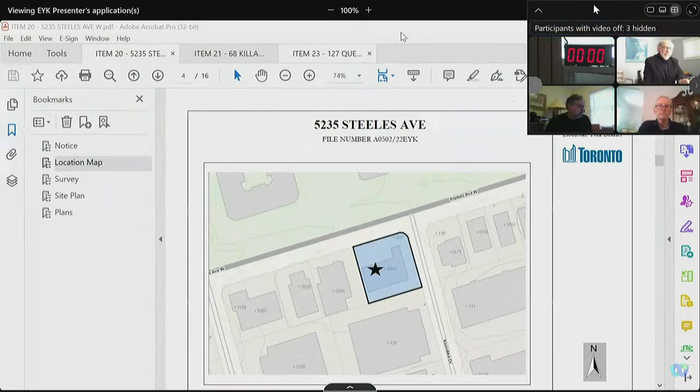Okay, and the speaker for this matter is Stephen Key. Welcome back, Stephen. Good afternoon, Mr. Chair and committee members. Sorry, I was muted. Again, my name is Stephen Chi, a senior planner from Design Plan Services. Okay, so there's no one else here. Just a brief one-minute explanation why you're here. Sure, it will be less than one minute. So the proposal is for a proposed restaurant to occupy unit 2 and 3, as shown on the site plan.

All the variances are only to recognize the existing conditions, which will be maintained. And I'm happy to answer any questions. Right, and obviously no one has any opposition to that. Transportation, planning, neighbors, we haven't heard, there's nothing on file. Okay, members, any questions for Mr. Keyes or someone ready for motion?

Mr. Taylor? Yes, Mr. Chair, I see this as a technical application, recognizing what's already in place. I'm satisfied that the application meets the 4 tests under the Planning Act, and I move approval without conditions. Thank you, Mr. Taylor. Seconder for that. Mr. Palmer's hand up first. Everyone else did as well, so I assume it's unanimous. All in favor? Okay, you have your approval.

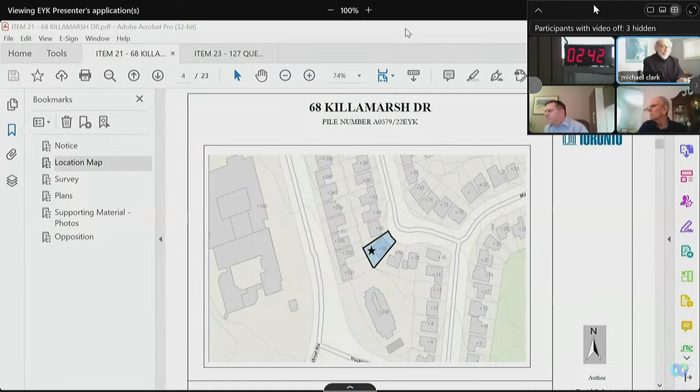Yes, loud and clear. Okay, this is for a 2nd-story addition above the dwelling with 3 variances. Seems rather straightforward. Do you want to advise the committee members of anything, or do you want me to just see if they have any questions? I don't think we need a whole presentation. I really don't have much to add. So, yes, we had the survey done. We didn't expect a few things, and yeah, here we are.

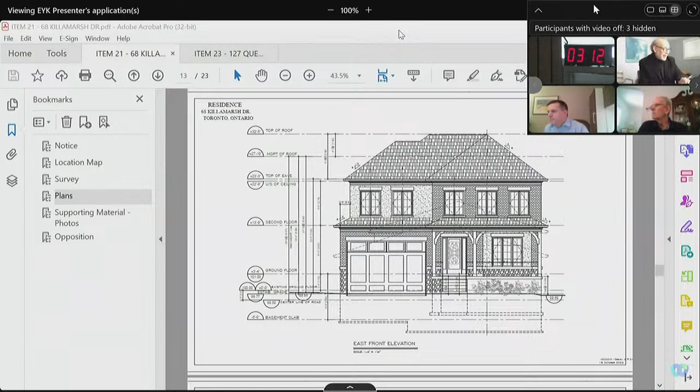Okay, and some of these are as a result of where the home is now, and you're just going to build up. Like, for example, variance 1, the north side lot line variance, that's where the existing home is already, correct? Yes, we're building exactly on the existing footprint. Okay, thank you.

Members, any questions for the homeowner, or is someone ready for a motion? Mr. Komorak? Yeah, I have no questions. If no one else does, I'm ready to do a motion. So I find the application to be minor in meeting the 4 tests, and would like to move approval with no conditions. Seconder for that? Mr. Taylor, thank you. All in favor? Okay, it's unanimous. You have your approval.

For item number 23. Okay, just hang on. Madam Secretary, I don't seem to have, hold on, looking for it. I have items 24 to 26 there. Okay, can someone do the introduction? Number 23 is 127 Queens Drive.

Yes. Okay, and now we're into deferral. The rest of the applications this afternoon are from matters that were previously deferred. So this was deferred from November 10th, 2022. So, Madam Secretary Treasurer, if you can do an introduction, please.

And we have one speaker, Jim Wallace. Yes, it's an application to construct a 2nd-story addition above the existing attached garage and a 2-story rear addition. On file, we have the previous minutes from the hearing, planning comments with recommended condition, and also the previous hearing materials.

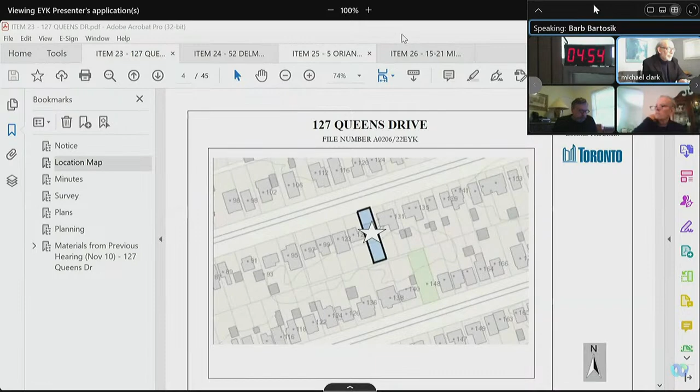Okay, Mr. Wallace. Good afternoon, Mr. Chairman and members of the committee. Welcome. Thank you.

Okay, so I don't think we need a presentation. Would you like to point anything out to the committee members? Not at this time. We worked with planning staff to address their concerns of the encroachment of the eave as part of the proposed addition over the garage. They wanted us to improve the condition. We agreed with their recommendation, and the eave of the addition no longer encroaches over the easterly lot line, Mr. Chairman. That's all I have to add.

Okay, thank you. Members, any questions for Mr. Wallace, or is someone ready to weigh in with the motion? Mr. Taylor? Yes, Mr. Chair, I'm satisfied that the two variances requested meet the four tests under the Planning Act. And I move approval subject to the Community Planning Department condition. Thank you. Seconder for that? Mr. Komarek? Just want to do a friendly, I believe there's a forestry condition too on it. Yes, thank you, Mr. Komarek. I accept that friendly amendment.

Okay. All in favor of the motion? Thank you. All right, yeah, it's unanimous. You have your approval. Thank you, Mr. Wallace.

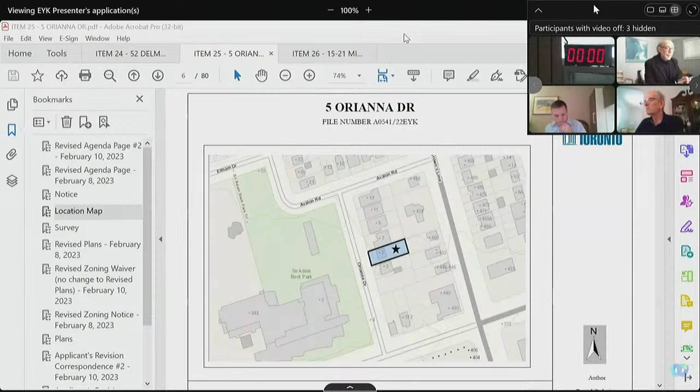Sure, let's have it, I see you've made some changes. There is no one else here in opposition. But just explain, I guess, the changes that you made to the plan.

Absolutely. So there was some back and forth with planning, sort of last minute, as these things tend to be. So we did reduce 3 of the variances, as you noticed, as you mentioned. First of all, variance number 2, the floor space index has been reduced from 0.58 to 0.56.

Secondly, the proposed side yard setback on the south side is now 0.99 meters, and that is to a chimney breast. The rest of the dwelling is set back further than that, and I can get into that in a moment. The other variance that has changed is the lot coverage. Because we increased the side yard setback, the lot coverage automatically reduced a little bit to 35.18%. The dwelling length remains as noted on the notice.

If we could just go to the site plan drawing, if you don't mind, please. There we go, thank you. So as I noted, the south side yard setback, which is at the top of this drawing, is 0.99 meters to that chimney breast. The setback to the dwelling itself is 1.34 meters, which is in excess of what's required by the bylaw. And the integrated garage is set back 1.04 meters. So that pinch point, that 0.99, is just to the chimney breast.

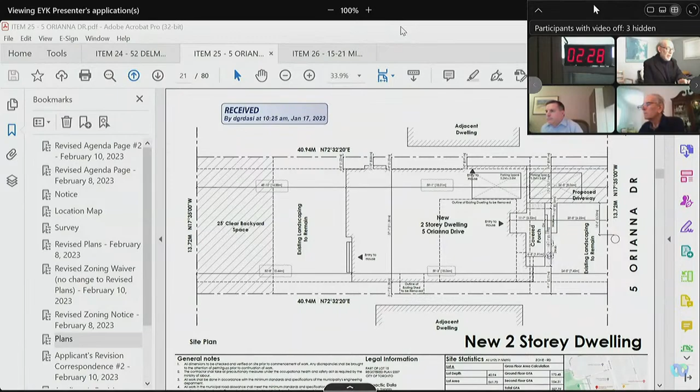Okay, and the last thing I'll mention, just one more thing, sorry. My clients did obtain a letter from the neighbor at 3 Orianna, that is the house to the south. The neighbor did state she had no objections to the variance, and those were the larger variances that were initially being contemplated. So she had no objections to those variances. I'm pretty sure she would have no objection to reduced variances that we're now proposing. I'm happy to answer questions.

Okay, thank you, Ms. Beaumont, for that presentation. Members, any questions for Ms. Beaumont?

And if none, it's just the purpose of the deferral last time, just to... There was the FSI variance that was missed on our zoning review. In addition, planning did have some concerns about dwelling length at that time. So we worked on the plans a little bit with them, and they were great to work with.

Any questions, or? Mr. Komorek? No questions. I'm satisfied with the presentation and would like to move approvals, as I believe it definitely meets the 4 tests.

So I'd like to propose we approve the revised, subject to the planning condition, which I believe illustrates the situation the applicant just described about it focusing on the chimney breast, tying it to the site plan of February 8th, and subject to forestry condition 1. Thank you, Mr. Palmer. Seconded for that. Ms. Reddick, thank you. All in favor?

Sorry, I'm sorry. Is it too late to introduce a friendly amendment? Sure, we didn't vote on it yet, go ahead. Okay, minor point, but could we specify that we are approving the variances set on a revised agenda dated February 10th?

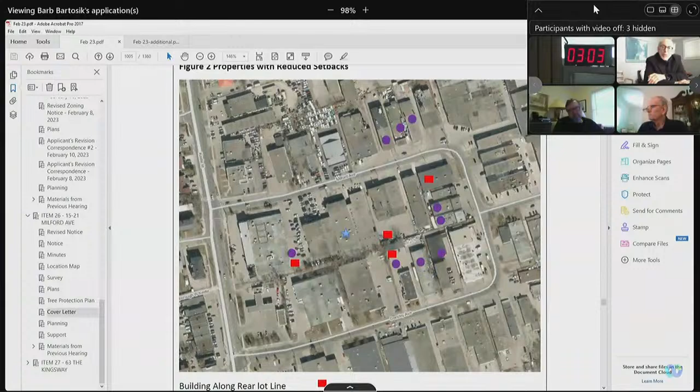If we go to the next slide, this is a slide that just shows properties in the area that have essentially 0 lot lines with respect to the side and the rear. So you can see that it is quite common in this industrial area, whether they're accessory buildings or the main buildings, to be located right adjacent to the lot line.

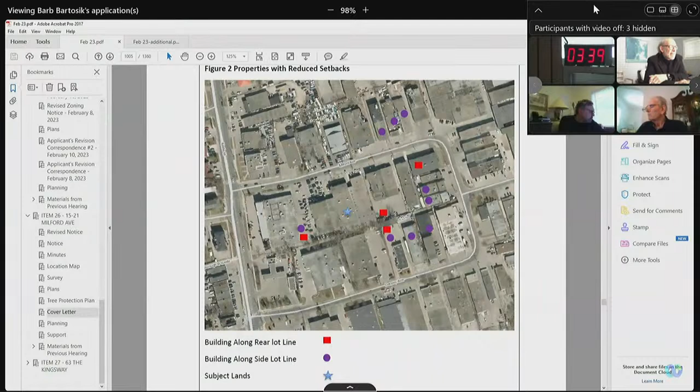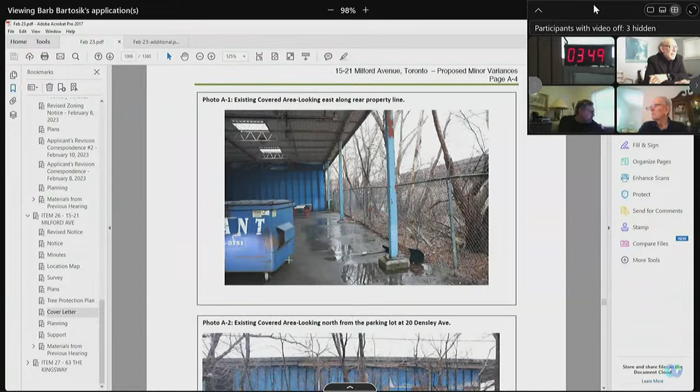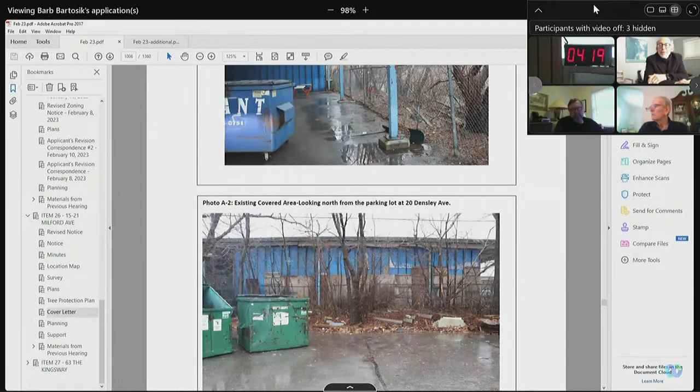If we could just go to the next slide—this is essentially the existing condition, and the proposal is to merely put sidewalls on that structure. The picture at the bottom is taken from the neighboring property, and you can see that it is a fairly, I'll call it, rough industrial area. Yeah, and certainly currently it is. Yes, it is. And then if we could just go to the next page.

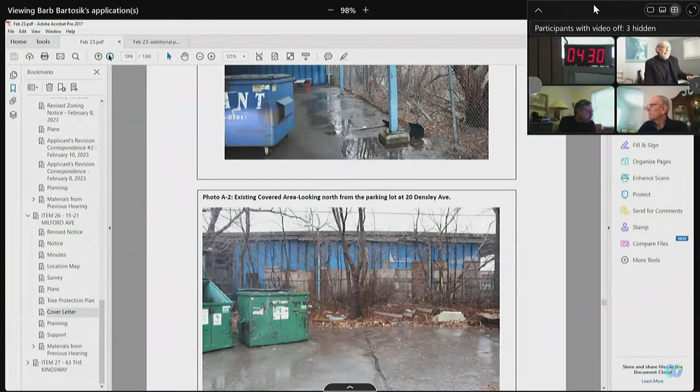And these again are photographs showing the existing condition, as you look from the neighboring property towards the subject land.

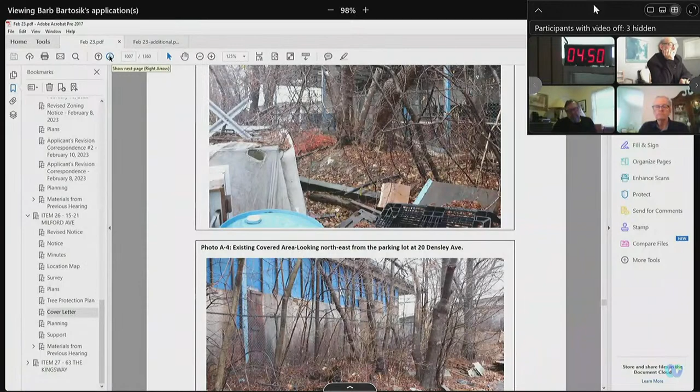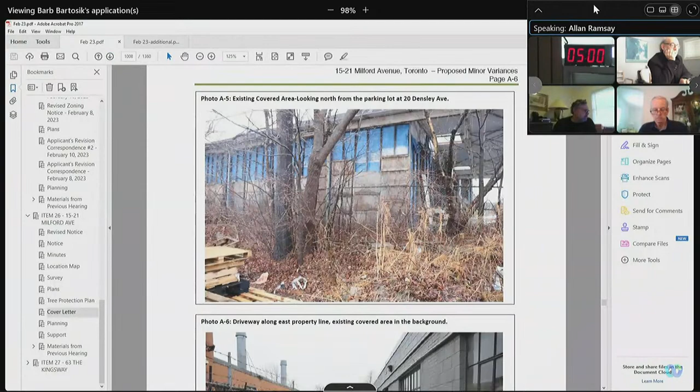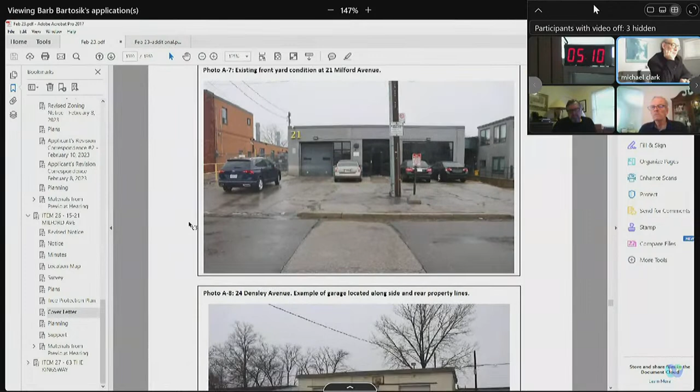So from a perspective of the 4 tests, this proposal, as I have spelled out in my report, satisfies the 4 tests under section 45(1) of the Planning Act. There are some staff comments which I want to speak to.

Staff have made 3 comments. One is that they don't support the 0 meter setback because of the impact on the trees, and it's my view that the existing canopy, as you could see from the pictures, essentially doesn't impact the trees on the adjoining properties. The second staff comment was that they wanted improved landscaping in the front yard, and my comment is that this matter deals with the lands at the back of the building.

And lastly, staff have suggested that they could support a 3.5 meter setback instead of a 0 meter setback, commenting that it wouldn't hamper the use of the building. With respect, the tenant has said that space is required - that 7.5 meters is required from a functional point of view. The intent is to permit trucks to enter the building and load and unload, and not do it outside, which would certainly be an improvement to the existing situation.

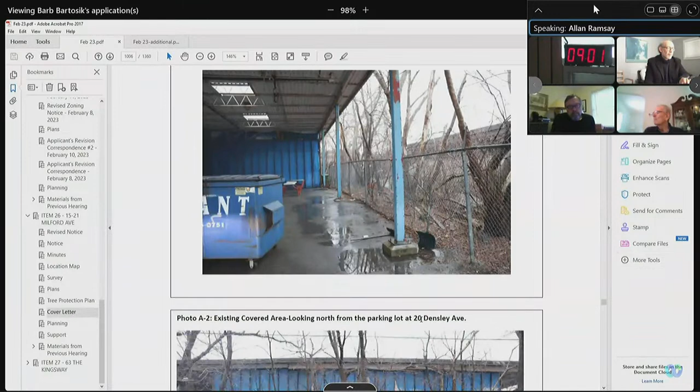Okay. Sorry, if I could just ask - Mr. Kumorek was asking about the other neighbors. Did you or your client speak to the other neighbors, or did you not think that was relevant? My client, who has an office building on the adjoining street, spoke to the business owners close by, and I believe he spoke with the party directly behind the subject lands.

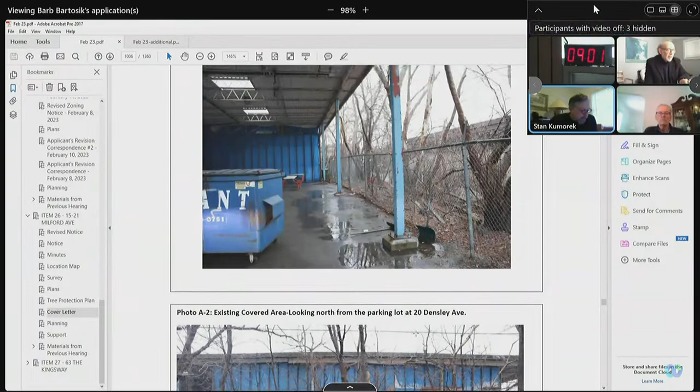Okay, so when forestry is referring to private trees, they're not referring to private trees on your property then? Well, no, they're not, because there are no trees on your property. That's correct.

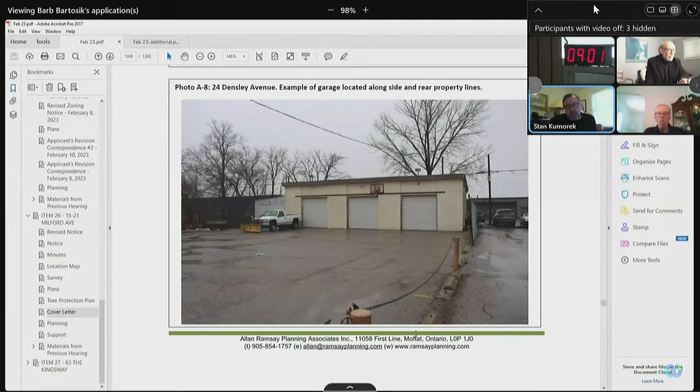Okay, sorry, if I come back to where I was going with the post - so what's being proposed here is a full extension of the entire building. You're not just going to enclose the existing structure and put partitions up between the existing posts? That's generally the plan - to not put new foundation footings in, but to use the existing posts. So you're not going to dig for footings along the full length of that wall? Correct. Okay. It's really just to enclose the existing structures so that they can use it in a more productive way than now, because right now they're exposed to the wind and the rain and the snow.

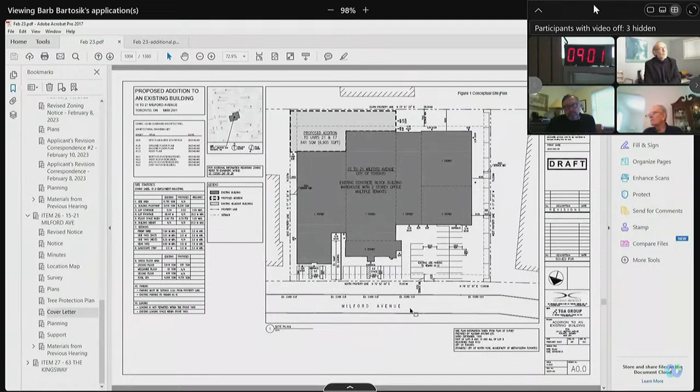I'm coming at it from the forestry perspective and damage to the trees and the tree root systems, which could happen if you're digging full foundations, but will likely not happen if you're not. That's where I'm trying to get the nuance. All right, so that is correct - the proposal is not to put in new footings.

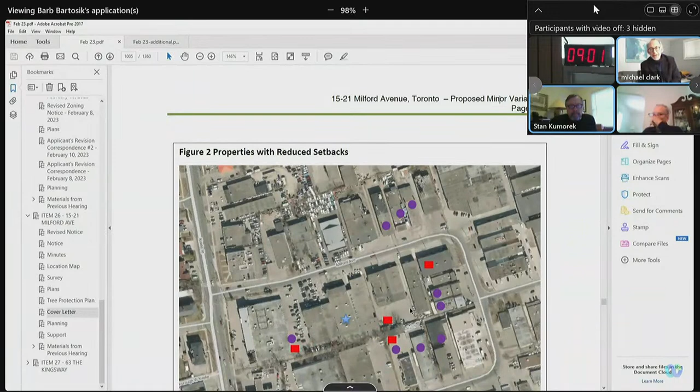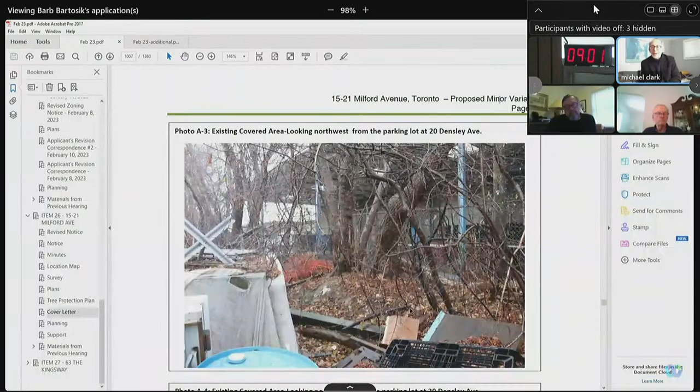Well, okay, once they have the variance - look at it here for variances. Once they get the 0 lot line variance, they can do it, whether they enclose it or put up plywood. I don't know if it's done temporarily, I assume it's going to be done on a more permanent basis. But beyond what's done, there's the right that we are granting.

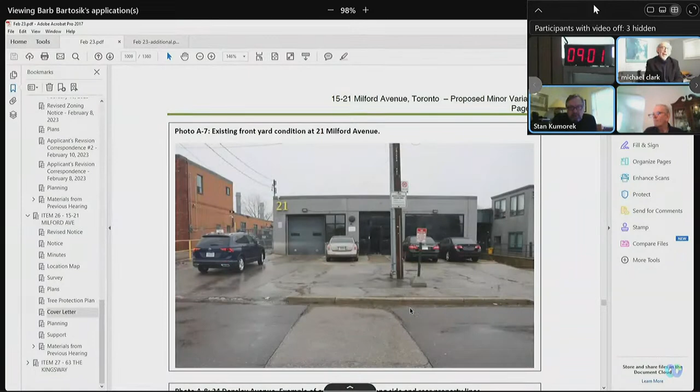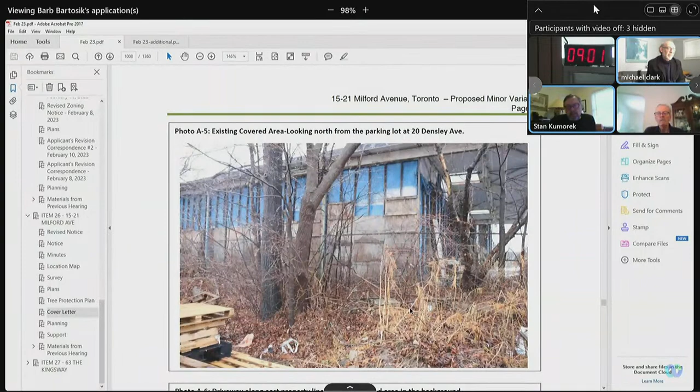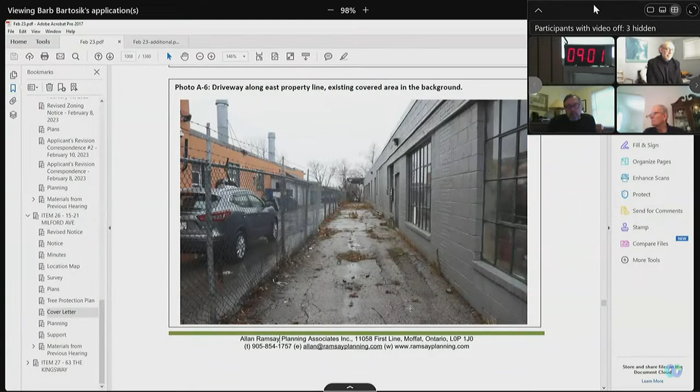No, I understood, and I got mixed up with the photos because there was one photo which showed an existing wall versus one that just showed the posts, and I wasn't sure if it was the existing wall that ran along that full length, or I gather that's not the case then. But okay, that wall is blue. That's the side of the building, but the previous photograph which had a blue tarp structure - that's a tarp, a cheap tarp. No, I understood, but below that it looked like there was a wall, but maybe I'm mistaken there. Okay.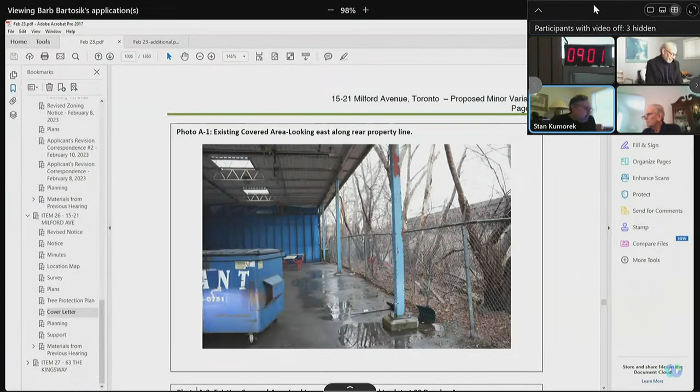Okay, anyone else have any questions for Mr. Ramsey? No, yeah, I think Mr. Kumorek asked my question about the neighbors. That's what I was interested in.

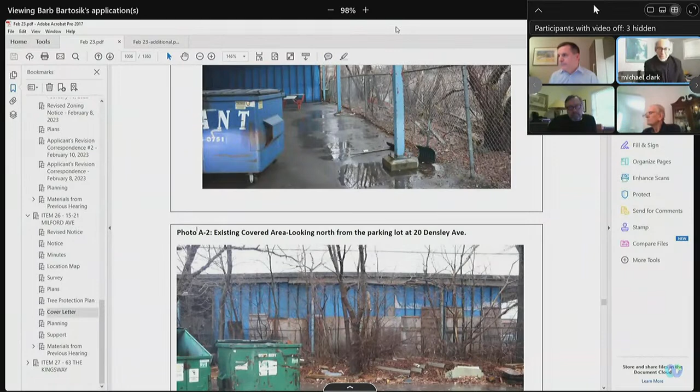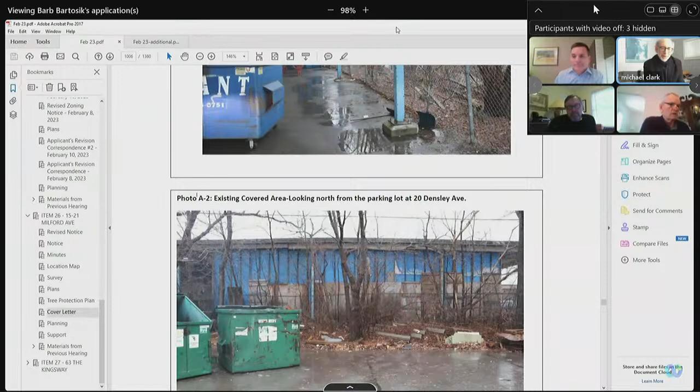Yeah, I guess we don't have anything from the neighbors, yay or nay, but the issue was properties get affected at some future time. Right now it looks like a complete mess, and they wouldn't even necessarily care. But if you give one property a 0 lot line, you're not hindering the adjacent property. I think sometimes in residential cases we often disagree with planning reports, but here on an industrial issue, I think we have to pay some attention to the planning memo here. Not that we always don't, but I'm just saying in terms of what they have to say here.

Does anyone have any comment on that? I know we have a letter from the councillor - she's in favor of this. Sorry, are we in discussion or are we asking questions? I guess we've heard from Mr. Ramsey unless he's asked another question, but you can certainly ask him a question at this point. I don't really have a question.

I've got a comment. I'm usually very much opposed to zero side yard setbacks and rear yard setbacks. Don't like it - it creates a functional encroachment on the neighboring property when you don't have permission for that.

And it's a bad precedent. That being said, I don't agree with the planning condition to add landscaping in the front yard, because that could potentially create other issues with maybe parking and whatnot. And if they're not meeting the landscape requirements, which I'm sure there must be in that area...

Such as a 3-meter strip along the road or something like that, does that lead to other issues? I'm also very sensitive to the operational needs of employers and the support from the local councillor about the number of jobs and whatnot. But I think when you come forth with an application such as this, you need to talk to the neighbors and look at the comments from the various departments and come up with solutions that everyone's agreeable to, rather than problems. I don't know that we want to be approving potentially future problems. That's kind of where I stand with it.

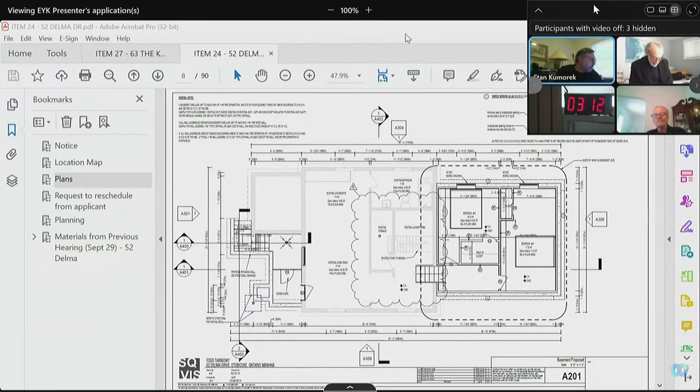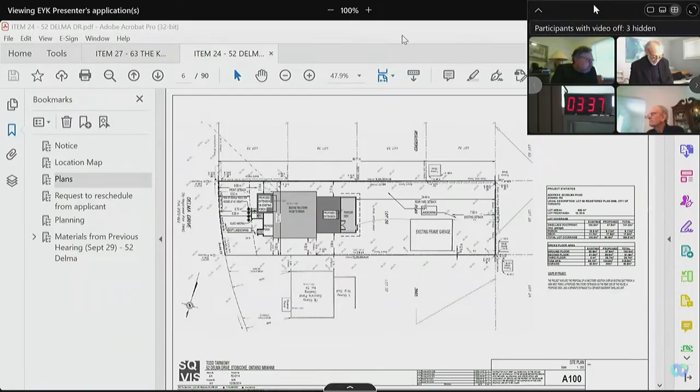Got it. Okay, I got the two staircases mixed up. Okay, thanks. Oh, my pleasure. Okay, any other questions? And I can confirm the plans are, we did receive them on January 26th, so that is correct.

Okay, I'm comfortable going forward with the motion unless anyone else has further questions. Yeah, I have a question.

I'm looking at the revised application page from, there's no date on it. Anyway, it says the purpose is to alter the existing dwelling and to construct a new front porch, third-story addition, two-story rear addition, and new rear deck. I think you're on the wrong item. I'm on number 24, 52 Delma.

Yeah, revised applicant's revision page. Again, unfortunately, no date, but it was with the material. Oh, it was with the materials from the September 29th hearing. So that's the old materials.

Right, but what I'm wondering is, so are we no longer dealing with a new front porch, a third-story addition, a two-story rear addition, a new rear deck? We're just converting an existing building from a one-family dwelling to a duplex. We're not changing the building at all. Is that correct? No, the purpose was incorrect.

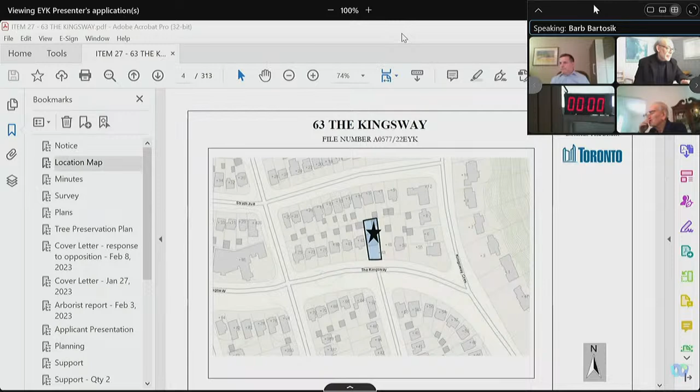We have the minutes from the previous hearing, a tree preservation plan, 2 cover letters, an arborist report, presentation materials from the applicant, a planning report with recommended conditions, 9 form letters in support, letters in opposition from 7, 9, and 11 Strath, 59 the Kingsway, 6 and 12 Kingsway Crescent. In your additional materials, we also had a further cover letter, opposition from 8 Kingsway Crescent and 56 the Kingsway, and then it looks like now there's a letter in support from 59 Kingsway Crescent. You also have the previous hearing materials.

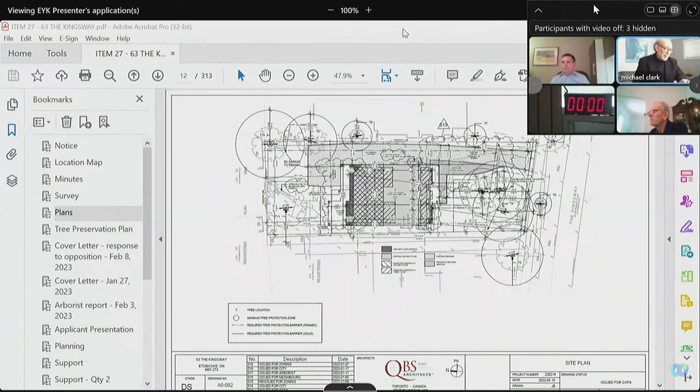Okay, so the first speaker is Saba Alma, agent for the applicant. Can I just ask you to outline as part of your presentation the changes that were made since it was here? It looks like you were at 0.7 and now there are some changes, you've made changes downward I believe. Outline that as well as why this application is worthy of support, as I believe there are neighbors here to make arguments to the contrary.

Absolutely. My name is Saba Al-Mathno, I'm from QBS Architects, the client's agent. Thank you for the opportunity to speak in front of you for the second time. I'll be brief. This house was built in 1928. My client purchased it in the summer of 2022. They needed to do some renovations and extensions to accommodate their lifestyle. They relocated to the neighborhood because one of the owners is a doctor at William Osler, plus they fell in love with the neighborhood. So in designing, we toured the neighborhood and used inspiration from architecture that already exists in the Kingsway, plus some of the client's needs.

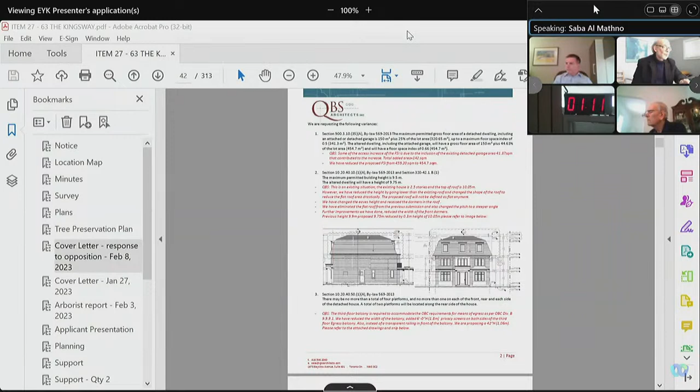Some of the changes we made from the previous application to this one: we went through every single letter of objection we got from the neighbors and accommodated that. We reduced the FSI, we eliminated the 3-story variance completely, so by eliminating the flat roof, the height reduced from 9.9 to 9.75 — the allowable is 9.5. For the platforms, we reduced the size of the balcony and enhanced privacy by adding privacy screening. For the driveway, we reduced the driveway width, and really this variance only occurs between the front wall of the house to allow for a proper drop-off. We analyzed previous decisions that were approved, and they were all within or higher than what we're asking for in terms of FSI and height.

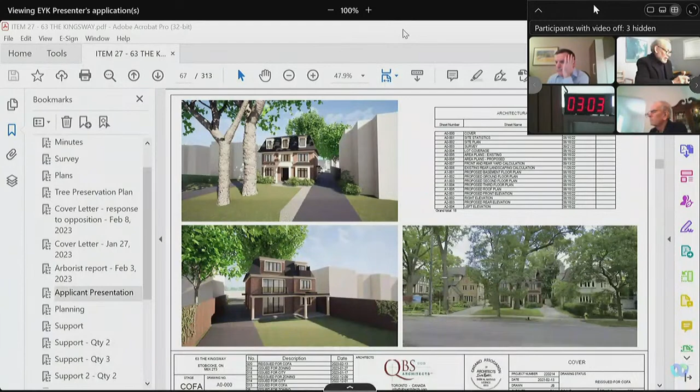We have a letter of support from planning because we worked with them closely between the first and second submission, same thing with forestry and transportation. The client went door to door to the neighbors 3 times before the hearing to drop off packages with my contact and theirs, in case they had any questions we'd be happy to answer. No one came through, then myself and the client went again on February 14, and she went again, so we were able to obtain 9 letters of support. We believe our variances are minor in nature. The FSI variance specifically is mostly due to including the garage in the FSI, and most of the square footage occurring is happening within the roof line of the 3rd floor. So we believe our application is minor in nature and we seek your support. I am here to answer any questions from committee members and neighbors.

Okay, thank you for that presentation. Members, does anyone have any questions for Ms. Al Mathno before we hear from the neighbors? Mr. Taylor and Mr. Komarek. You're muted, Don, you're muted.

You're muted. Thank you. Yes, ma'am, you referenced some precedents in the area where the houses are this size or even bigger. I'm most interested in the immediate context, that would be north and south sides of the Kingsway, between Kingsway Crescent in the east and whatever the north-south street is at the west end. Prince Edward Drive North. Do you have any precedents for homes this size or bigger on either side of the Kingsway between Kingsway Crescent and Prince Edward Drive North?

So through you, Mr. Chair, if you look at page 35 of the presentation I sent the committee for hearing day, there's a Google map. We're just in the process of pulling it up. Exactly, so these are the examples that we used, and they are numbered. This shows the proximity to our neighborhood.

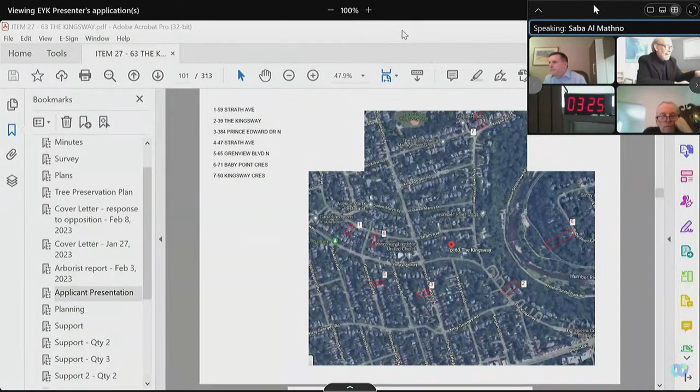So for example, 59 Strath Avenue, the approved FSI was 0.71, which is on sheet 37, two sheets down. Thank you so much. So this FSI was 0.71. And then 39 Kingsway, the driveway width granted was 6.71 meters. 384 Prince Edward, the driveway width granted was 5.81. I think the issue was the FSI, not the driveway.

Yes, width, yes, because they are coming more, sorry. So 47 Strath, also the one after, FSI was 0.72, it's number 4 on the agenda. And also they had a driveway. And 50 Kingsway Crescent, floor space index 0.65, we're asking 0.66. And they have the height also here, 9.5 allowable, they were granted 9.9. And last one, 65 Grenview Boulevard, the FSI granted was 0.8.

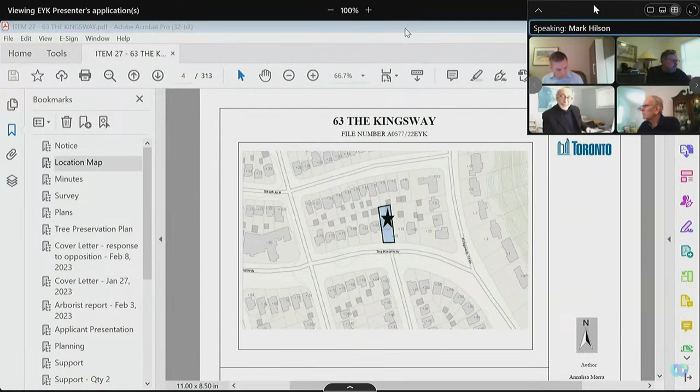We strongly object to the application to expand the scale and scope of the property. It suggests that these variances are minor, which I feel is somewhat disingenuous, given that 3 of the 4 variances exceed the limits by a minimum of 31% to 100%. I don't think anybody on this call or in this meeting would agree that a 31.9 to 100% increase in their monthly budget would be minor in nature.

Yes sir, I'd like to hear more, because we don't go by percentages. You'll be surprised how many minor variance applications are like this. So let's deal with the impact and not with the numbers. We understand numbers, we understand the definition of minor and major, but please, if you can, talk about it in context, because sometimes 100% is considered minor - it depends what the number is. I appreciate everyone, I think the same way as you, but the number argument is not the road you want to go down. Let's hear about the impact and what's typical and the prevailing character of the neighborhood. That's what we go by.

Well, I agree with Ian's earlier comments that I don't feel the design and scale is at all in keeping with the nature of the neighborhood whatsoever. You can see that just looking around without needing to be an architect or a planner.

More particularly, and again consistent with what Ian just said, having a 3rd floor balcony with oversight into everybody's backyards, their bedrooms, their bathrooms, and everything else is really an offensive invasion of privacy. We shouldn't have to live in a neighborhood where people have the ability to peer into your backyard and into your windows, having to keep your drapes closed all the time.

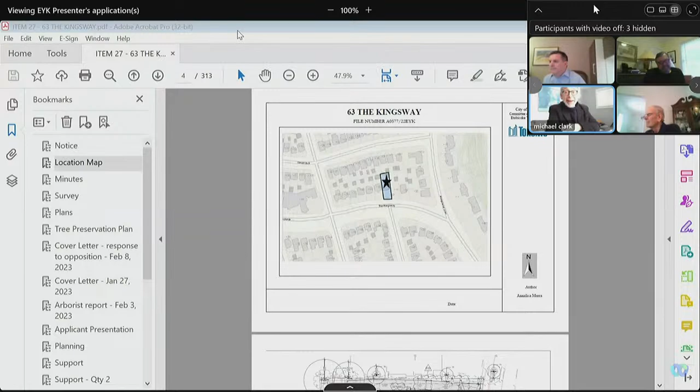Okay, thank you, Mr. Smith, and thank you to all the neighbors for not mentioning percentages and concentrating on impact and the prevailing character of the neighborhood and the definition of what the neighborhood is, as honed in by a couple of the members in their questioning. So if no one has any questions for Mr. Smith, we'll return to the agent, Saba Al-Mathno, to respond to the concerns of the neighbors.

So thank you, Mr. Chair, for the opportunity. And I wish the neighbors had contacted us when we sent to them the letters of objection, the package again, so we could have resolved that.

If it seems to be the balconies are the major concern, so we will eliminate this variance altogether. So we will— Sorry, eliminate— you're in rebuttal right now. You can't be making revisions. So we're not, yeah, this is not, it's a hearing. So as Madam Secretary said, you're responding right now to the concerns and questions raised by the neighbors, not to start redesigning based on what you heard. So what's before us is what's before us.

Sure. So what we have, we believed the changes we've done by adding the privacy screens, which we could make them permanent. You could see in the front, we are proposing a wall. It's not like one of these flimsy screens. On the sides, this could be a permanent wall as well to enhance the privacy.